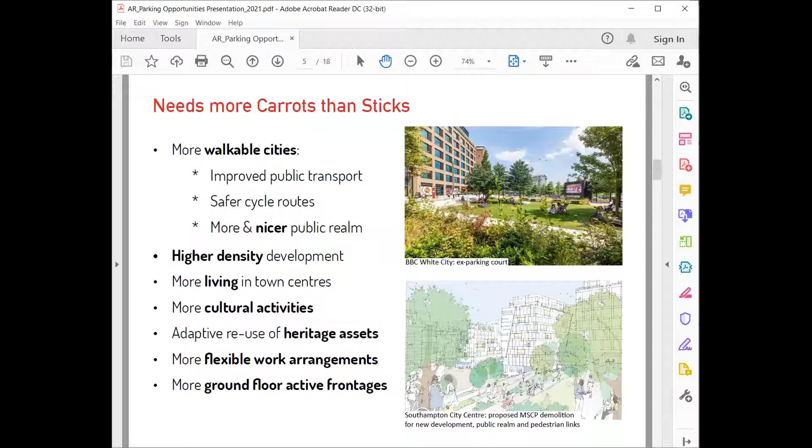So what are the resistors to change? Well, political will is a huge one, and transforming the male, pale and stale councillors and highways officers. I'm terribly sorry to be rude to any highways people who are listening, but we come up against problematic highways people all the time. We need younger and greener councillors, people in power, people who make the decisions, people who sit on planning committees. This is a very general and maybe provocative statement, but I think it would help.

However, most retailers will resist this hugely because they believe that if somebody can't park outside their shop, nobody's going to actually come and spend their money. So there's a massive education process needed. Fewer car parks, and as we all know, living in London, and probably happening in the rest of the UK too, low traffic neighbourhoods have produced enormous fights in various parts of London with people who want to use their cars and drive them everywhere, kicking up an enormous fuss. And that's indicative of wider issues.

Next slide. So a couple of case studies. This is King's Lynn in Norfolk. Next slide. This is all the at-grade and multi-storey car parks around this rather fantastic heritage town. It's not a city - the most enormous amount of space in the most brilliant town.

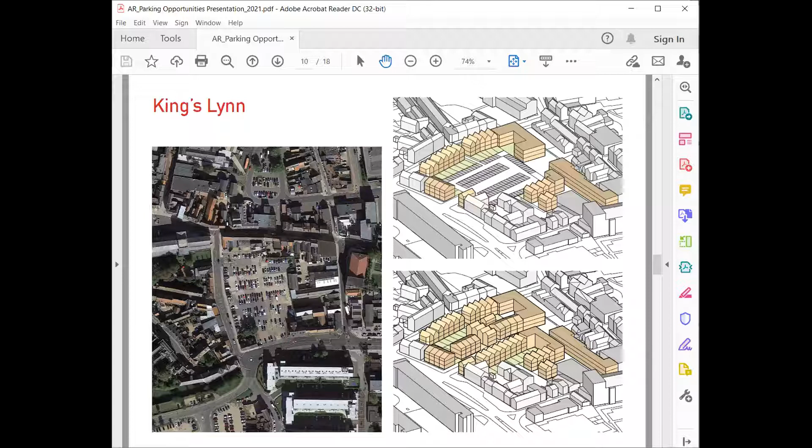And the context of this is, as you can see, heritage, rather wonderful church, and also some very old buildings with very fine grain footprints all the way around, which used to also occupy this at-grade car park. So trying to replace it with something that kind of respected the scale and form and had a whole lot of similar uses. And this was just an image really to show them.

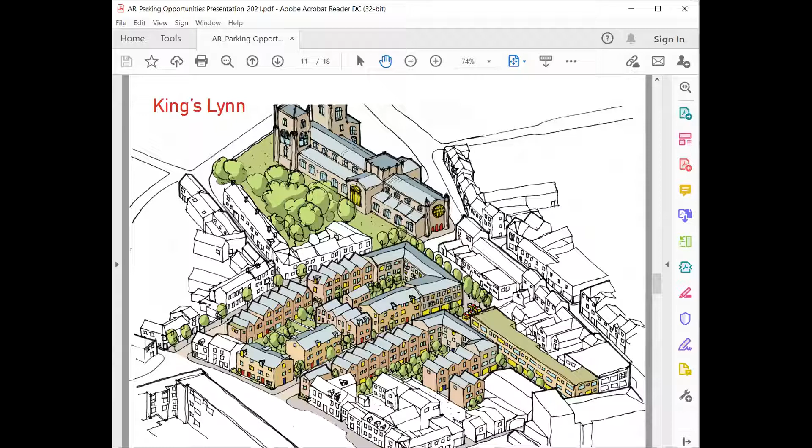So the next slide. And just to finish up on that - this was a couple of years ago, we finished the King's Lynn project, and the councillors had a huge problem with it. They wanted us to look at redeveloping all the car park sites, but they wanted to re-provide the car parking and add other car parking for the development there. So we had the most massive difficulty getting them to understand that you really can't do that, and we wouldn't be achieving anything. But we did identify satellite car parking locations just on the edge of the town, which would have been really good for them to start shifting the parking out. As far as I understand it, they've so far done nothing.

And Boston, just up the road, or up the river really, around the coast from King's Lynn, is in a similar situation, and you can just see from this aerial photograph how much car parking there is. The top right-hand corner is the old market square and the fabulous parish church, which they know as the Stump.

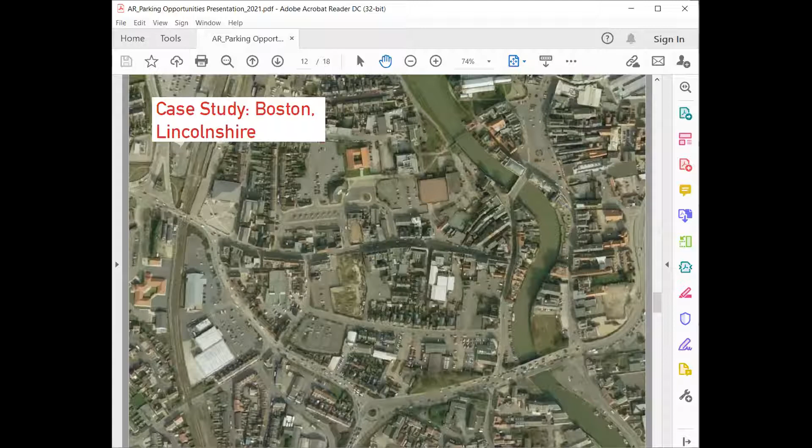This is all the at-grade car parking, public, private, etc. Next slide. This is all the cars. Next slide. And the brilliant Stump up there. This was the site identified around here, which had single-storey buildings, retail buildings, and a wonderful pedestrian bridge to the marketplace, the railway station over to the left, and no coherent wayfinding between the two.

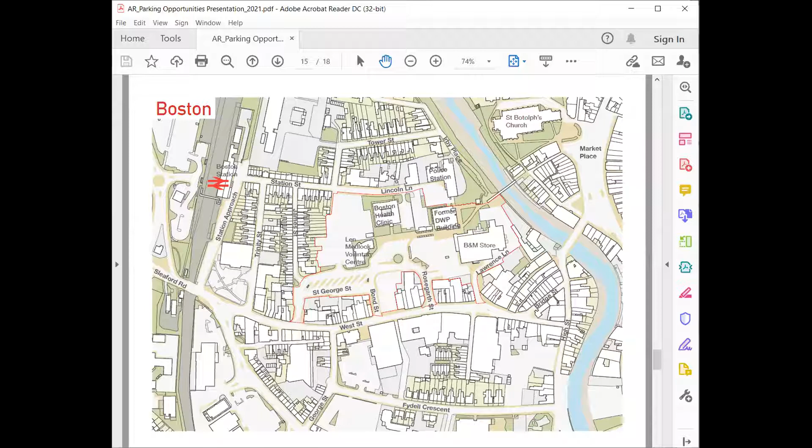So we propose - the next slide - quite a lot of moving all the car parking out as much as possible and getting a linear green space in here, which actually linked up between the river and still made a meandering connection to the railway station, but it got everybody a lot closer, brought a whole lot of different uses into the town centre, connected with and supported the existing town centre, plus gave them a really important sort of semi-rambler green space there.

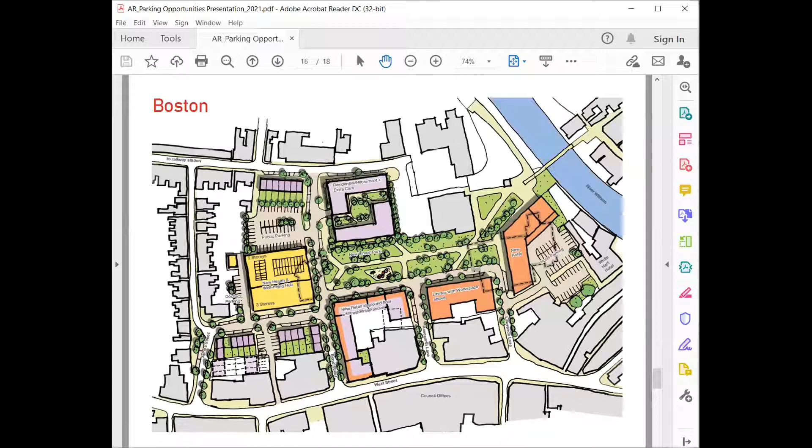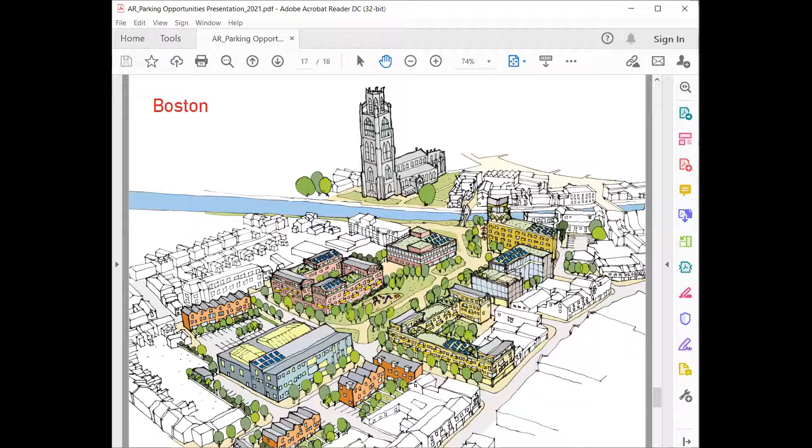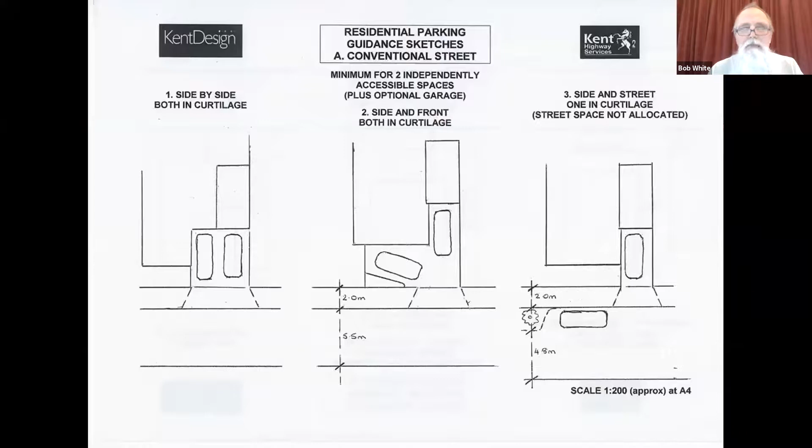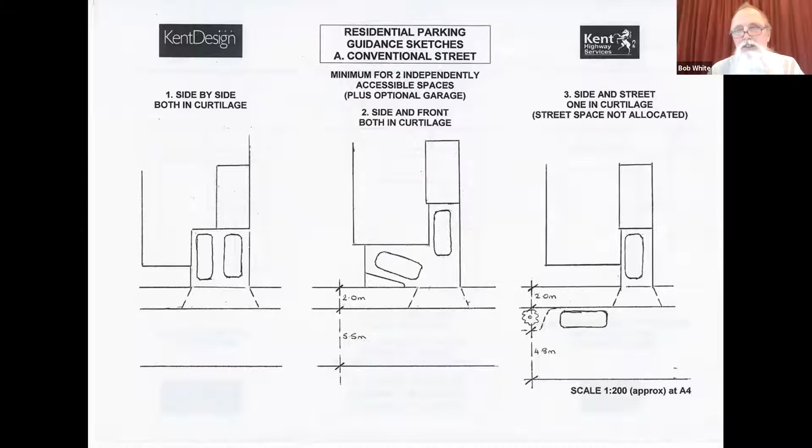These are just some sketches that indicate basic curtilage parking or on-street parking or a balance of both, showing they don't have to be land hungry. Garages are not a reliable form of parking unless you have waiting restrictions and they are the right size, but they can be incorporated into a design. They often end up as storage, bike store, motorbike store. So that's one option with a conventional street. Those figures aren't set in stone, I should add, neither would the design be quite as rigid.

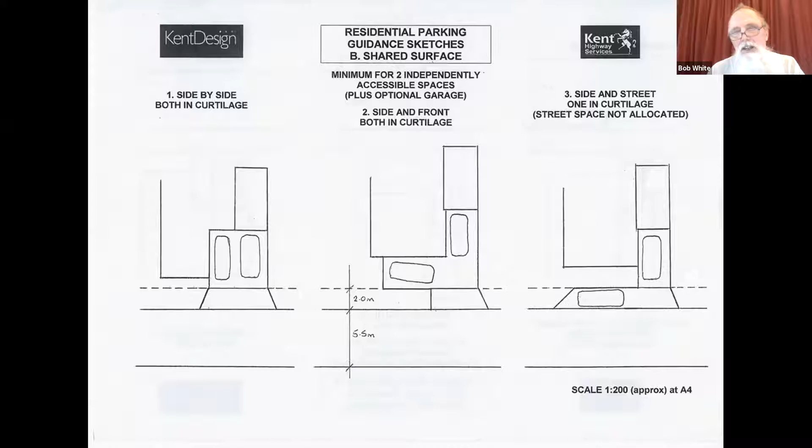But if you're going to adopt a shared space approach, then it can be done even more modestly with an approach like that.

We've so often had negative views of residents saying how poor their developments are for parking, and how this impacts upon safety, especially as regards their children wanting to play in the street. Yet where parking is delivered in the right way, you find children can play in the street, and those are places where people meet and socialise, with opportunities for everybody to work together to get parking as part of the design.

Coming back to the point, if we want quality streets, we can design parking into those streets if we're willing to take an approach that doesn't ideologically push them out. Unless there's going to be control mechanisms or they're in the right place, which many developments still aren't, cars are here to stay, and we need to accommodate them in a positive way that contributes to the design.

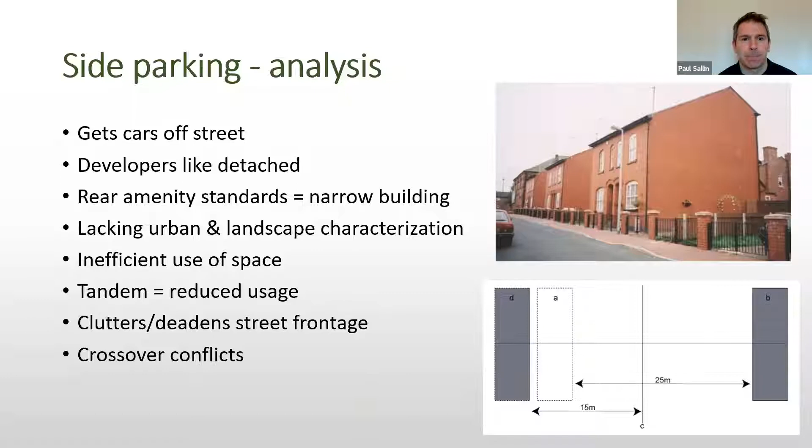And the next typology is front of plot parking. So it is the dream in isolation of other issues, though it does lead to quite a few problems at the same time. So the car and driveway dominated street scene - the top image on the right is from the Essex Design Guide, which is probably the best rationale for not doing that type of parking. You've got scant space for greenery. You tend to end up with vacuous street proportions - obviously it's set back behind the parking. It's not very intimate. Again, you've got the crossover conflict.

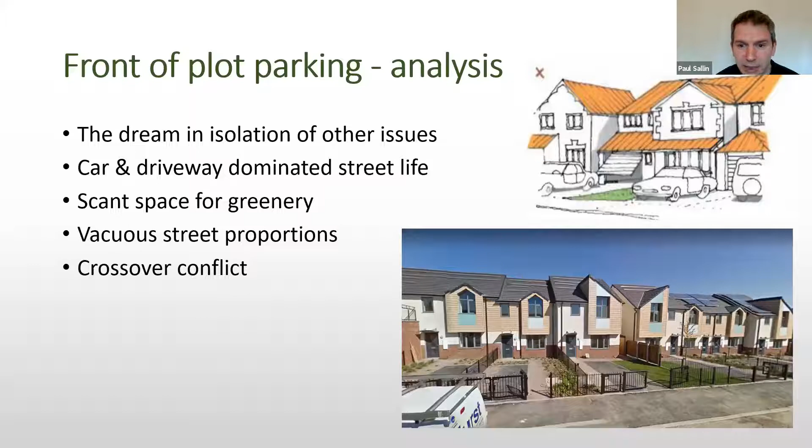So in terms of solutions, the bottom right image is Goldsmith Street, which is the RIBA Stirling Prize Award winner. It's based on an area which includes the street in the top right image. So it's quite a simple solution - I must admit, it's a bit strange why it's not used more often. Getting back to our roots of on-street parking, it's unallocated, so it caters for the average car ownership. It's adding value in terms of place and density.

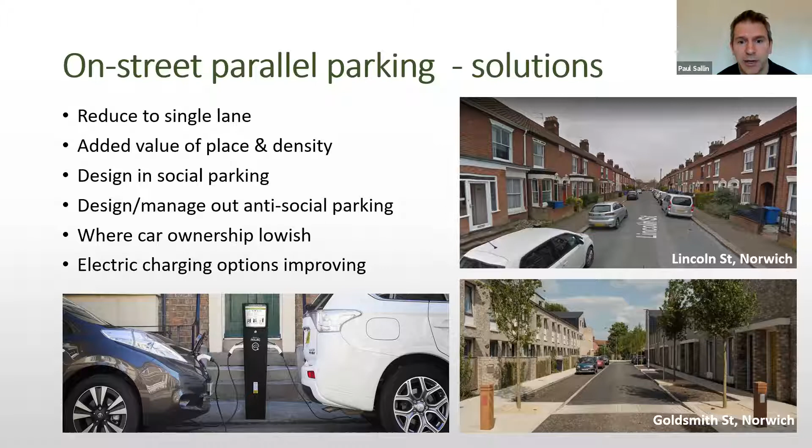On-street 90-degree parking is also liked by developers. You often spot it - it's an easy way to normally spot the affordable housing that commercial developers provide, the 30 or 40%, because it's an easy way to squeeze in the maximum amount of properties. But everything gets squeezed, apart from the spatial dimensions, which become quite vacuous again. And for pedestrians, quite often you're forced to walk around the 90-degree parking.

So what are the solutions? I think it's mainly a case of designing them as places, not just parking areas - designing them as building-enclosed parking squares, designing them as tree-lined avenues, such as the bottom right, that's Horsted Park. It's making sure that there's reasonable space between the windows and cars, so they're not squashed in. Still, I would suggest it's only in moderation - it's quite difficult to do successfully in terms of the street scene and street life.

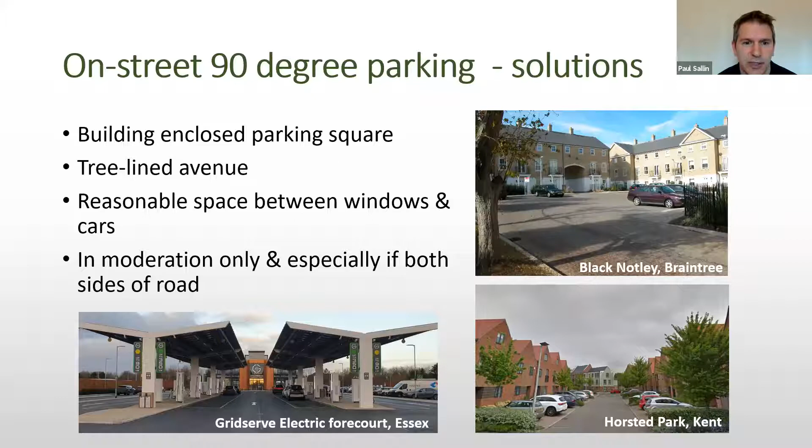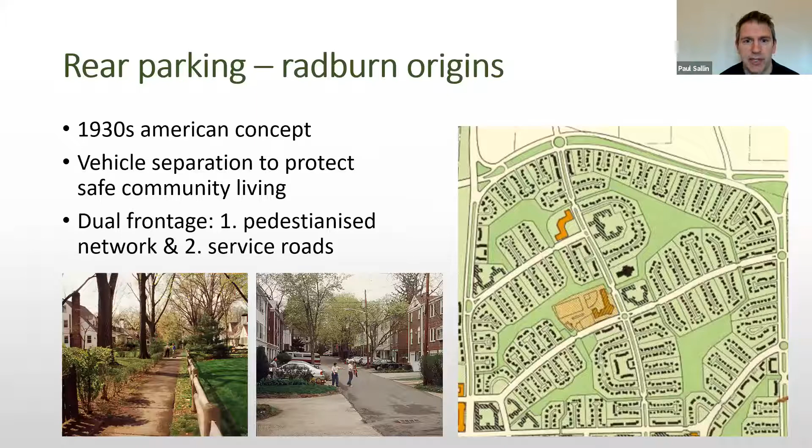Last one is rear parking. For those who don't know, its origins lie in the Radburn concept, a 1930s American concept about vehicle separation to protect safe community living. It had two frontages - a front to the pedestrianised network and a secondary front, which was the service road that provided the parking. How that translated into the UK was slightly different in the 1950s to 70s - the key distinction was it created a back normally onto the parking. Unfortunately, Radburn became increasingly discredited as a concept, as there were lots of different variants which went away from the original concept, though the rear parking court was resurrected.

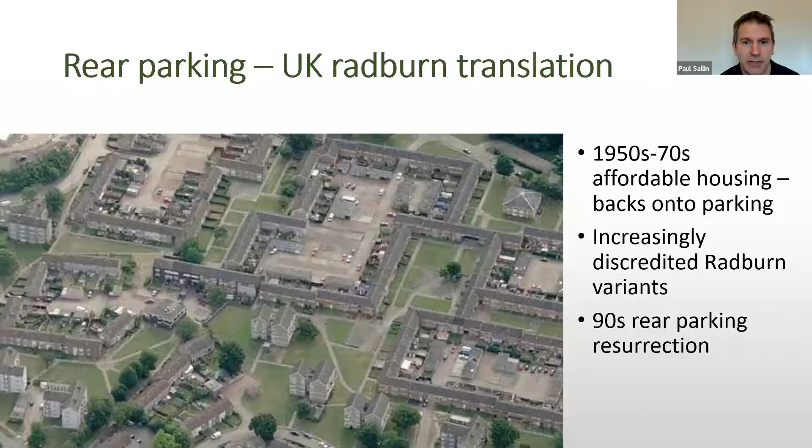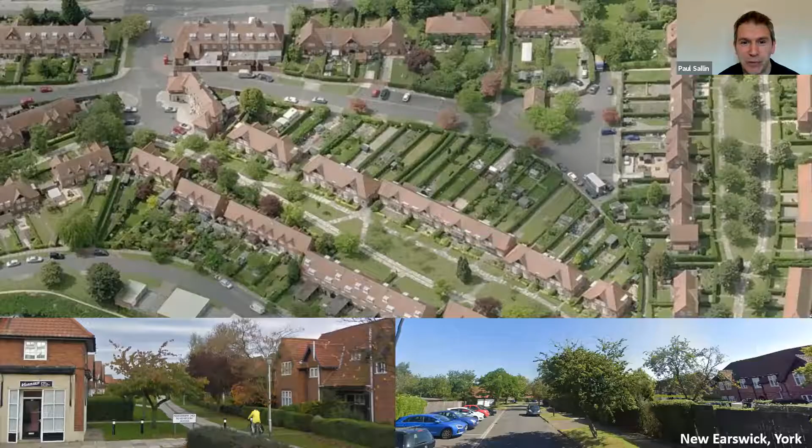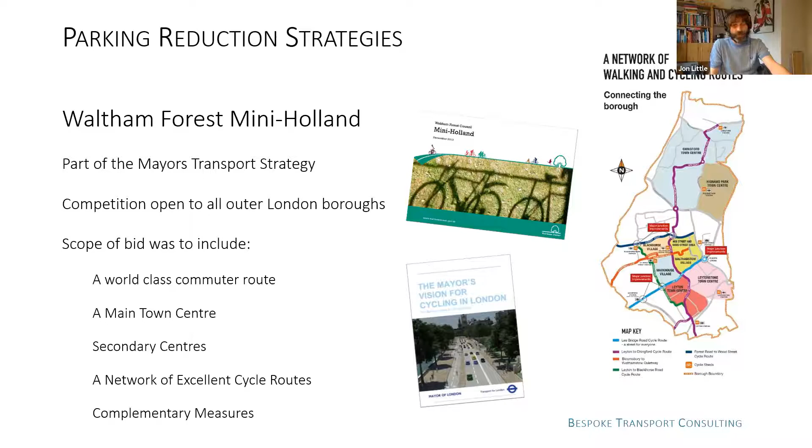Waltham Forest Mini Holland - I'm going to skip through these very quickly, but needless to say the whole programme was based around reallocating road space, and parking was an absolutely vital part of that. That's not to say, of course, that providing parking in the right places wasn't vital as well. But lots of the main roads, like Lea Bridge Road, before things happened, may have had a bus lane down them, for example, but that operated 6 hours a day, and the rest of the time it was effectively one long parking bay.

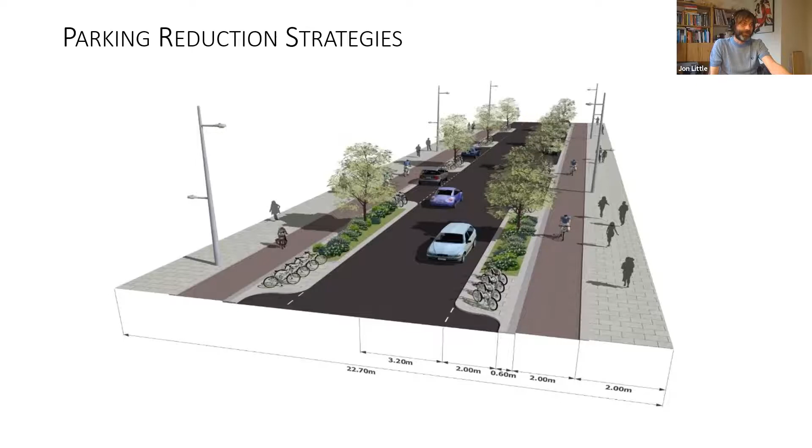But as it was, it wasn't good for anybody, I think it's fair to say. Whilst businesses were used to working the way they were, and change is change, it doesn't look the most inviting of places. People went there kind of despite those conditions.

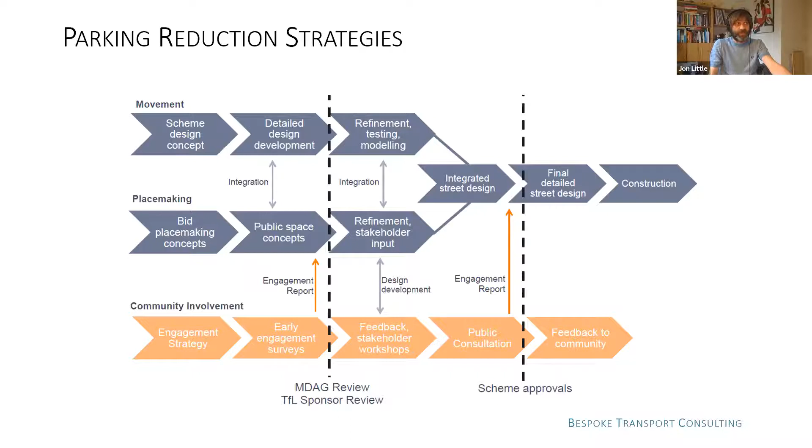So the process we tried to go through was that effect. It looks very complicated, but the idea was a continuous conversation. It was about getting the data and information into the process to have a conversation with people about that change, which we knew was going to be difficult. The demonstrations, I'm sure you may have heard about.

At the same time, we were going out on Lea Bridge Road talking to people through a perception survey, asking what they thought, asking businesses what they thought, and also their customers. This meant when we went to engage them on the scheme, trying to put that template down on the ground, we were informed by data, informed by opinion and views, some conflicting, some hated what we were up to, and still do.

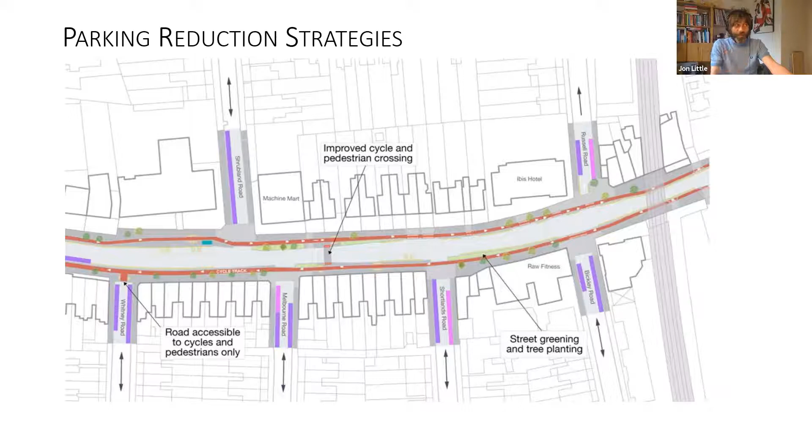But what we could also do, because we'd spoken to businesses, was provide parking in the side roads where it was needed, in order to transfer that space we wanted on the corridor to provide for movement and place, as you can see in the street greening and tree planting that's been added or was proposed to be added.

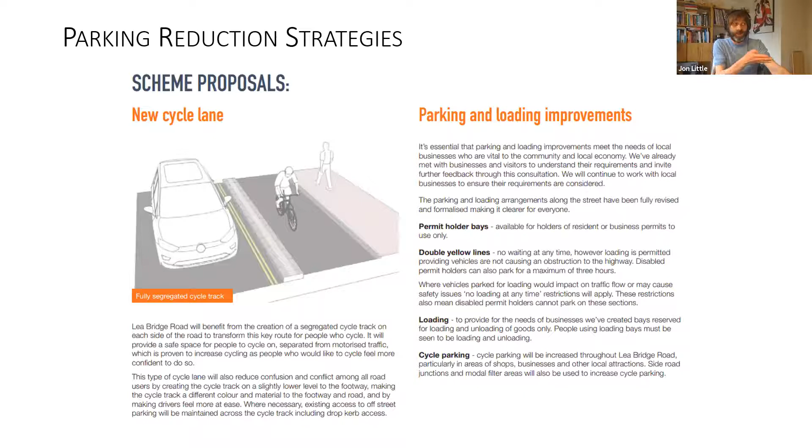It's vitally important that you go through that process with businesses. So whole pages were dedicated in the consultation document to parking, what was being provided, where, how it would work, and also why the space was being modified.

Even more important was to explain to businesses that sometimes they haven't got this right. Having worked on tens of controlled parking zones and various other things in my past, businesses always overestimate the amount of people that drive to their shops, primarily because people moan about not being able to find a parking space.

And let's not forget that businessmen and businesswomen are business people. The idea is they're in it to make money, surely. And customers are customers, it doesn't matter if they get on a magic carpet.

And talking of red carpets, when you get it right, you can provide for disabled access on Lea Bridge Road, and there are destinations people want to go to. This was a real concern of our design process, because we wanted the scheme to be a street for everyone. There's no better indication than a guy in a mobility scooter, who people worried might be prevented by the cycle track from accessing the mosque or parking, using it right in front of me on my cargo bike. That's as good as it gets, transferring a visualization into real life.

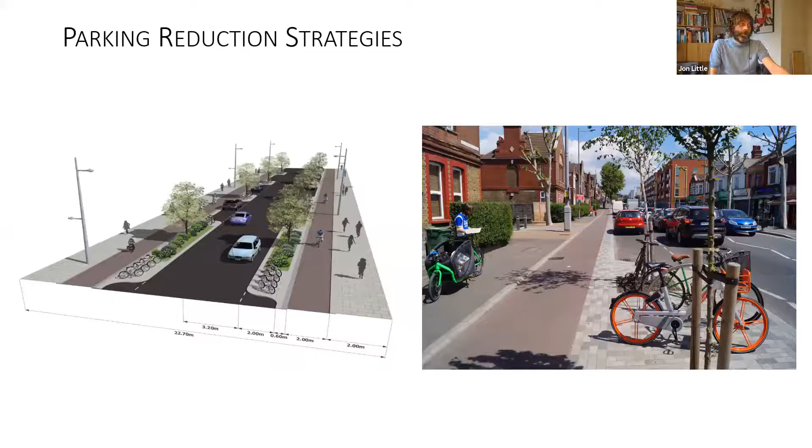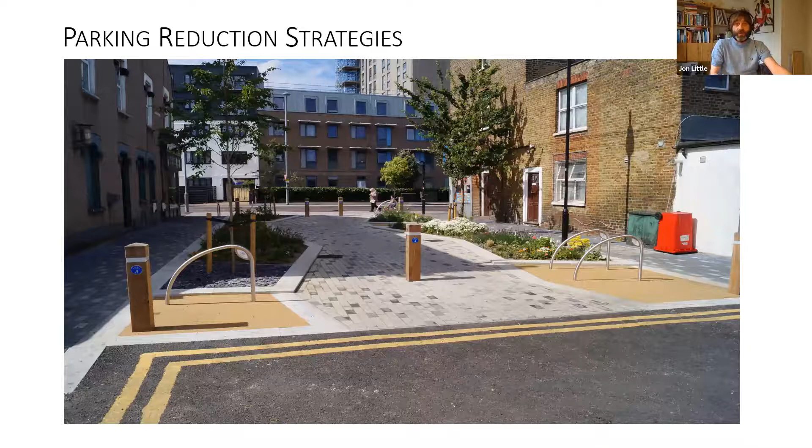Parking is controlled. In this urban environment, that provides massive benefits because you can chip away at it, manage it and modify it, providing 4-hour bays for hairdressers and 30-minute bays for shops. When you do that, you can take away spaces and create meanwhile spaces and meeting places. This is a modal filter, to prevent traffic movement into a residential area, but it's also a garden. It's a place, a space that didn't exist before. It's a barrier and a gateway as you come off Lea Bridge Road into the residential neighbourhood. It's a decision point and a message.

The end of that street has been turned into one-way working. That parking bay on the raised section of footway is two disabled bays together for the Samaritans and another destination well used by disabled visitors. So there's parking there for the people who need it. The rest who may want to park have bays further in, and provided they have a relevant permit, they can park within their area. The idea is we manage parking demand by providing an alternative for short trips, cycling and walking, which enables different uses.